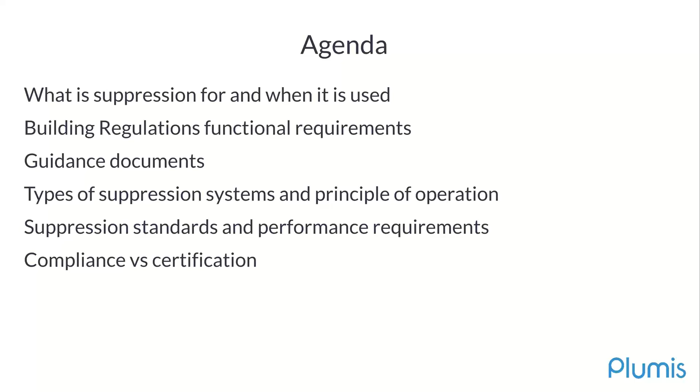And then the most common types of suppression and the difference in operation between them. The key objectives of suppression standards and their performance requirements - that's the part where stakeholders should really be versed. The difference between compliance and certification, which is also frequently a confusion, and an explanation of other suppression industry jargon.

Then I'll talk about, following Dame Hackitt's Building a Safer Future report, fitness for purpose. And finally, I'll just talk about ongoing development in the residential fire suppression world.

So first, let's start with first principles. What is the purpose of suppression? There are only two key objectives really when you deploy suppression for life safety, and this presentation is about life safety.

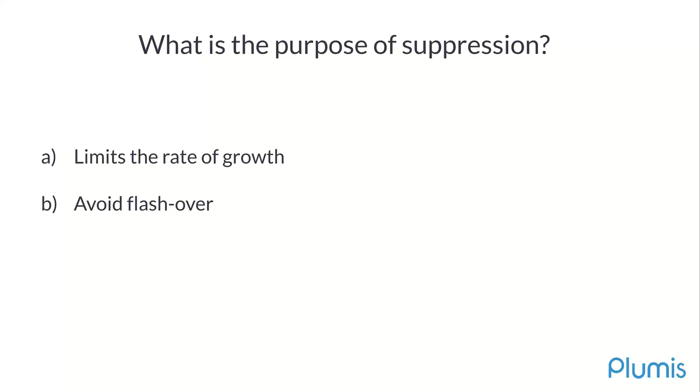So the first is to limit the rate of growth of a fire, so that effectively the definition is that the growth is reduced. And the second is to avoid the flashover, where the temperature of the room is so high that every item in the room combusts. These are really the only two things, and everything that comes into meeting the functional requirements of the building regulations is a function of these two key purposes of suppression.

So I'll explain this a bit more. In your typical fire growth curve, you firstly have ignition and there's a period of incubation. The fire then progressively grows as it spreads. There's a progressively higher heat release - the amount of power of the fire, usually measured in kilowatts or megawatts, which is the heat produced by that fire.

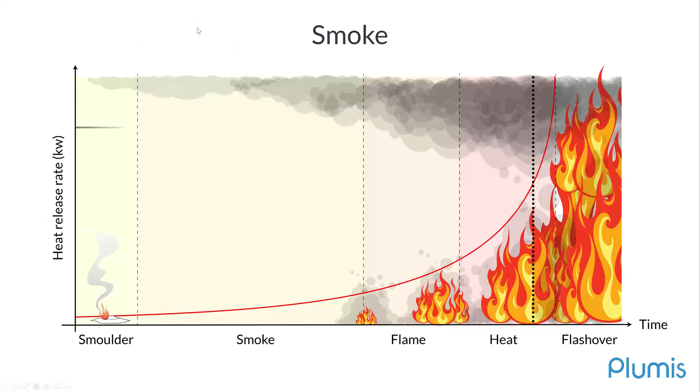As you can see, this grows parabolically - this is a function of time squared. And of course, there's a moment during the fire growth that if the person is trying to escape, there's a limited time until they can do that, at which conditions become untenable. That is the tenability limit. The whole point of suppression is that it avoids reaching this tenability limit, so that the available time for escape can be extended.

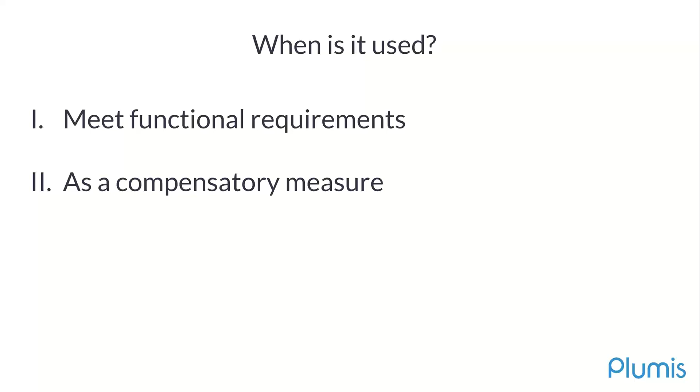So when is suppression used? Well, there's a few ways in which it's used in the building regulations. The first is to meet functional requirements - these are B1 to B5 of the B schedule of the building regulations. The second is to be used as a compensatory measure, where the functional requirements are being breached or not met by the design of the building without the use of suppression.

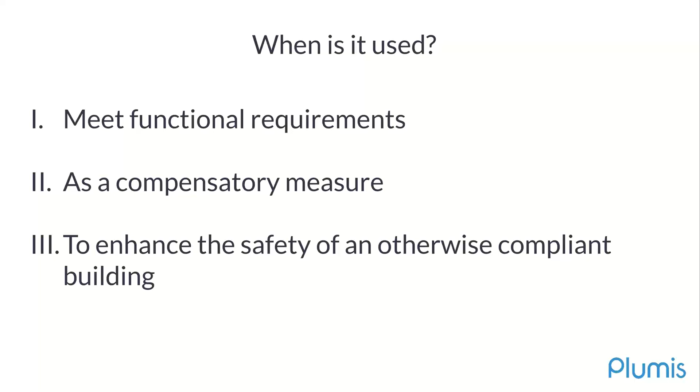And then the third, which is becoming more common, is to enhance the safety of a building that would be otherwise compliant with its current design.

So going into what is meant by the functional requirements, there are 5 functional requirements, B1 to B5. I'll go only through those really truly relevant for suppression. The first one, B1, is that there has to be a warning of fire, and there also has to be a means of escape to a place of safety.

And the first clarification that I make is that a building has to comply with the building regs, not the suppression system. I mention this because this is something which is often incorrectly asked of us. The suppression is just a tool to contribute to making the building compliant with the building regulations.

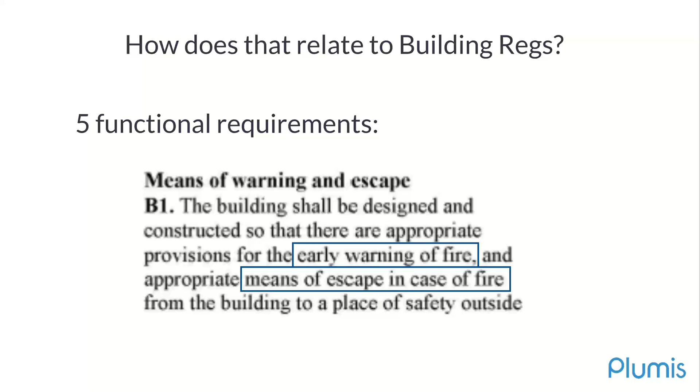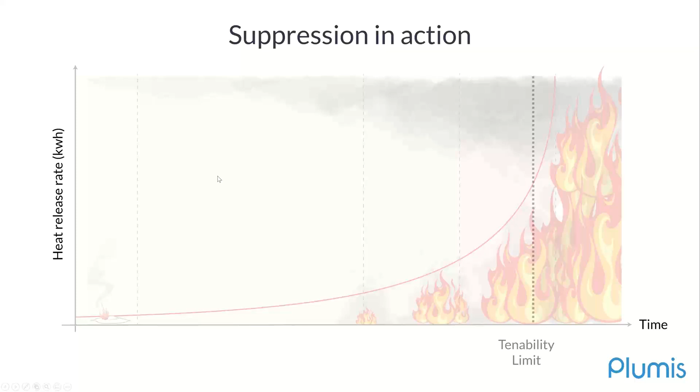Although protected escape routes and alarm systems are the most typically used tools for meeting B1, suppression can also contribute to that. The activation of suppression increases the period of tenability in the room, effectively increasing the time the occupant has to escape through the means of escape.

The activation of suppression is also a possible means to warn occupants of a fire, whether the suppression system is linked to an alarm system or whether it integrates an alarm system within its functionality.

Another clarification I should make is that the means of escape is not just the stairs and the corridors. It is every compartment which is part of the escape route. We've unfortunately seen too many requests for suppression systems to be used only in the stairs or corridors because that's what's been interpreted as the means of escape.

However, there is typically no fire load in stairs or sterile common corridors. It is the areas of occupancy where there are fire loads, and these are the ones that need to be protected when they are part of the escape route. So this is a typical misunderstanding.

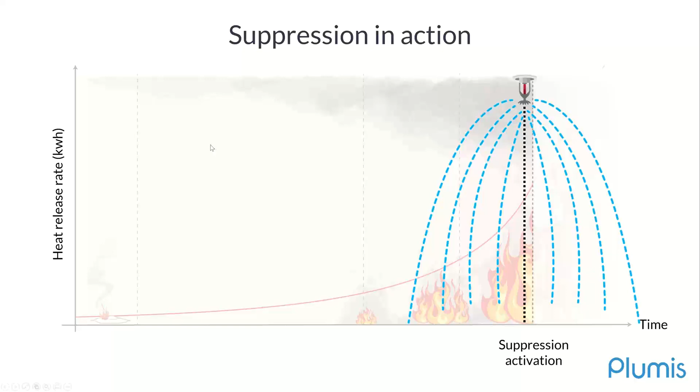So then I'll talk about B3 as well. It talks about internal fire spread. Again, as per suppression, we're avoiding a flashover - where temperatures are too high, and as a result there's a need to ensure that the fire is contained in the compartment of origin.

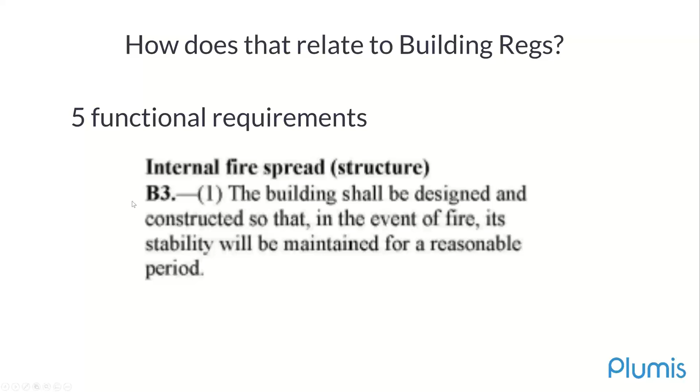However, suppression can be used as a secondary layer, basically, to ensure that the fire will not spread beyond the room of origin, where passive fire protection has already been used.

So now if I cross the objectives of suppression with the functional requirements of the building regs, we can see how, for example, limiting the growth rate of a fire buys time for egress through the means of escape, contributing to meeting B1. And by avoiding flashover we're helping the role of passive fire protection, which avoids fire spread from the compartment of origin, contributing to B3.

So a second way to use suppression within the building regulations is to act as a compensatory measure. This means that if the design of the building as is, without suppression, cannot comply with the functional requirements, then suppression can be used to compensate for that and return it to a compliant status.

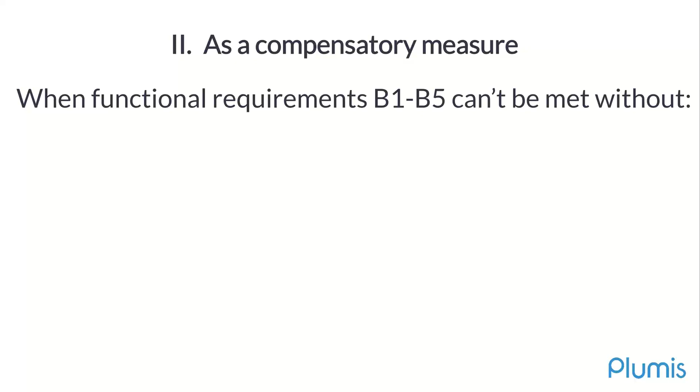For example, if the building has been designed with a single escape route, or the escape distances are longer than what fire engineering considers safe, then suppression can be added, and by delaying the fire growth, the available time for escape is extended so as to meet B1.

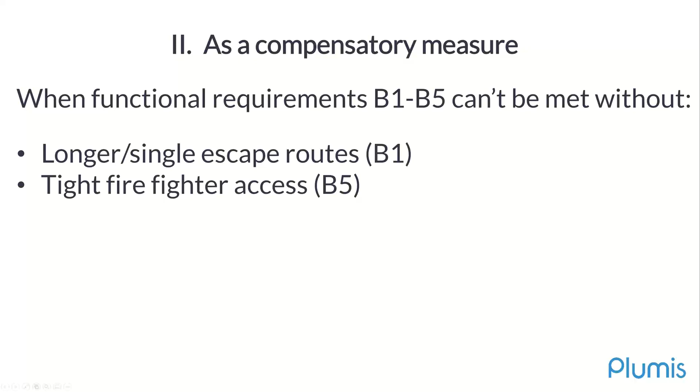Similarly, B5 talks about access to firefighting engines, for example. When there's limited fire engine access, suppression can be used to extend the time firefighters have to reach the building and contribute to the fire suppression exercise. This is typically known as the 45-meter rule, and it is a typical use of suppression as a compensatory measure.

Then we have another example, which is open plan layouts, where a flat might have a living room and a kitchen together, which are part of the escape route. This is where there are fire loads, and this is where suppression again extends the time occupants have to escape while the fire is developing.

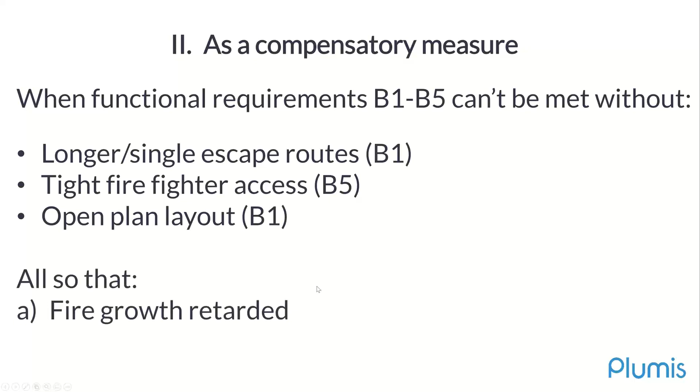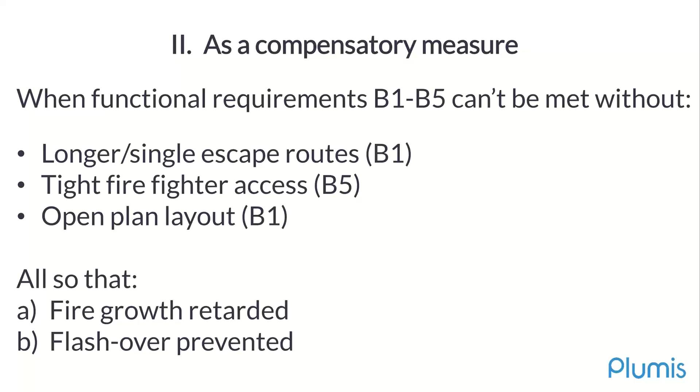In all cases, these are the functional requirements that might be met by relying on the fire growth being retarded and/or flashover being prevented. Unfortunately, these first principles of suppression and the building functional requirements are frequently forgotten within the multitude of guidance documents available. And when suppression is specified, it's also not very common to find the statement of why it's being used, what objective it's trying to achieve, why it's being used as a compensatory measure, for example, unless a fire engineer is really involved, which is really unfortunate.

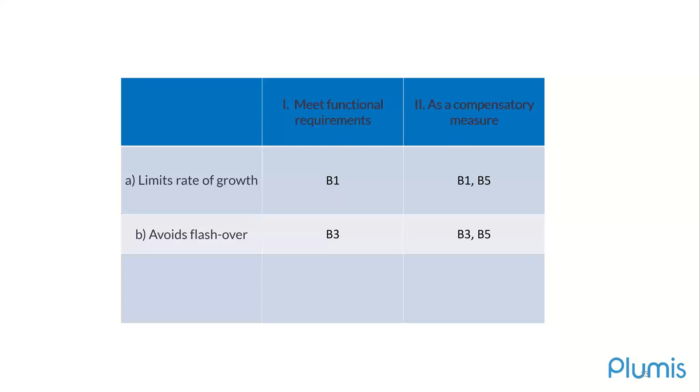So this table is really just a summary of what I've just stated about how suppression and the functional requirements work together, through limiting fire growth and avoidance of flashover. However, it's important to note that nowhere in the building regulations is the expectation that occupants will remain in the room of origin and that tenability will be maintained indefinitely. It's assumed that occupants are always mobile and that they will escape.

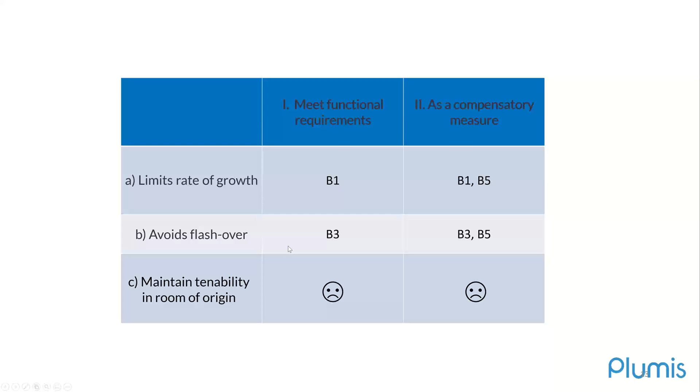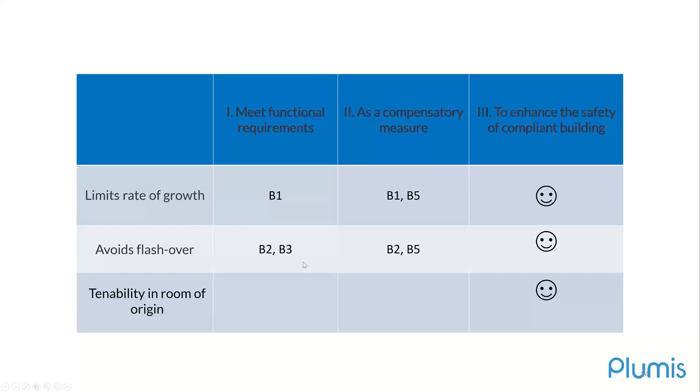There are systems now being designed with this additional objective in mind, regardless of whether the functional requirements in the building regulations require them or not. This is the third trend I'm talking about: enhancing the safety of an otherwise compliant building. It's an additional layer for improvement of B1 and B3 where it's already technically compliant, such as requiring suppression in new builds above 11 meters in height. It can also protect those who do not have the mobility to escape from the room of origin. This goes beyond what is required by the functional requirements of the building regulations, but it is present in some guidance documents, such as the Specialized Housing Guide.

So I'm going to use an analogy to explain the difference between building regulations and guidance documents. The building regulations are the performance requirement. In this example, the performance requirement is to get safely from A to B. Approved Document B is a guidance document, and it would say that a ladder is an example of a tool that has been historically accepted for getting from A to B. ADB also states that if using a ladder, it's best practice to use a standardized ladder that fits the ladder stencil, which ensures that a ladder will work best as a ladder.

So which are the common guidance documents that specify suppression? ADB recommends the use of sprinklers, and BS9991 recommends the use of sprinklers or watermist. What's the difference between the two? It's just a different level of sophistication, where BS9991 dives more into the details of the world of suppression and fire engineering. Both are based on the same principles I stated earlier. The difference is that BS9991 has more detail on the types of buildings and types of suppression systems that can be used.

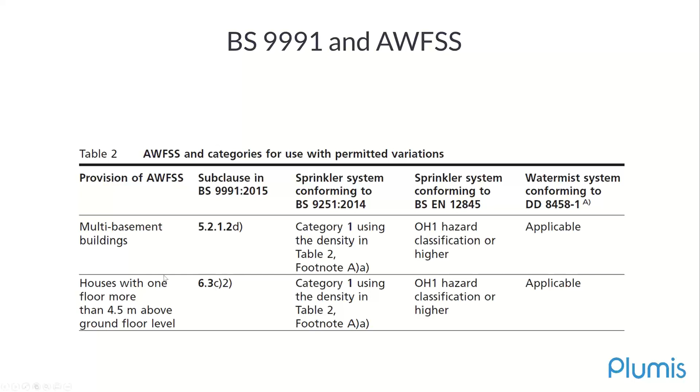Another clarification: one does not have precedence over the other. Both are just guidance documents based on historical practice. As with the ladder example, both require common sense and due diligence. Neither of them is the law. It's only B1 to B5 which are the law of what I've talked about today, which is basically like the ladder — the law is the performance requirement of getting from A to B, not of using the ladder itself. The ladder is one of the ways you can achieve that. This is an example of a table extracted from BS9991, showing more granularity in the use of suppression.

So let's start going a bit deeper, starting with the oldest of the automatic suppression methods: sprinklers. Firstly, for residential purposes, they only exist as wet pipe, meaning the pipes are charged with pressurized water all the time, and the nozzles are activated by mechanical means using a thermobulb. This also means that because sprinklers are primarily driven by gravity, the nozzles tend to be mounted high, usually close to or on the ceiling, so that gravity can help in the wetting process.

So how are sprinklers defined? How are they coded, or better still, what are their stencils? These are some of the more common standards, and I'll go into more detail about the differences between them later on.

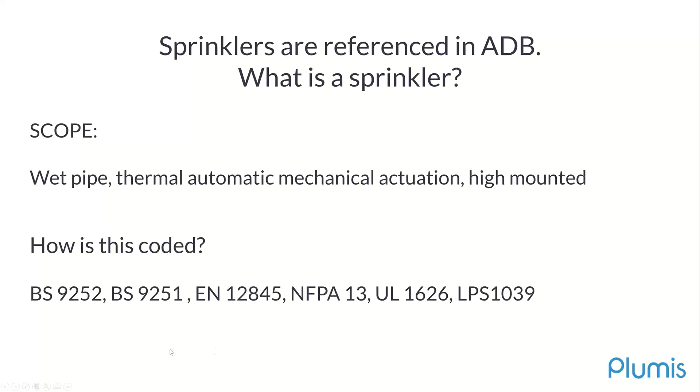So the first patent for sprinklers was in 1882 by Mr. Grinnell. As you can see, today's nozzles don't look much different from what they used to. That's in part due to the very smart, brilliant design, but also in part because once it was coded into a standard, its scope became very specific and narrowly defined. That limits how much the sprinkler itself can vary, because before it becomes something other than a sprinkler, it falls out of the scope of the standard that guides it.

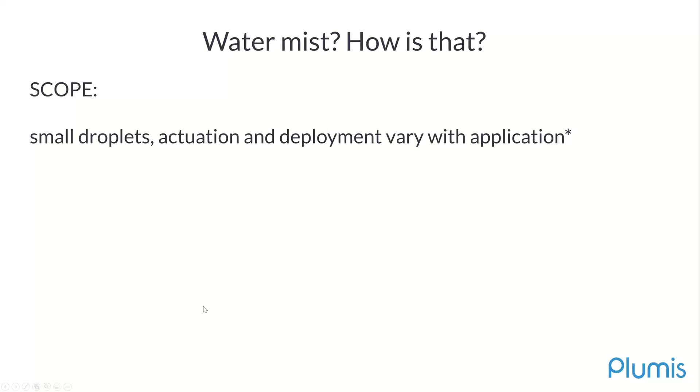On watermist, internationally, its definition tends to be much broader, although for domestic systems in the UK it's still currently only a wet pipe. More internationally, variations in how it's deployed are much wider, and how it's therefore implemented depending on the application is also much wider. The key definition for watermist is really that it is the use of small droplets, smaller than 1 millimeter in diameter. I'll go into more detail later.

And again, how are they coded? There's a number of standards. I'll go into detail on what each one of them means.

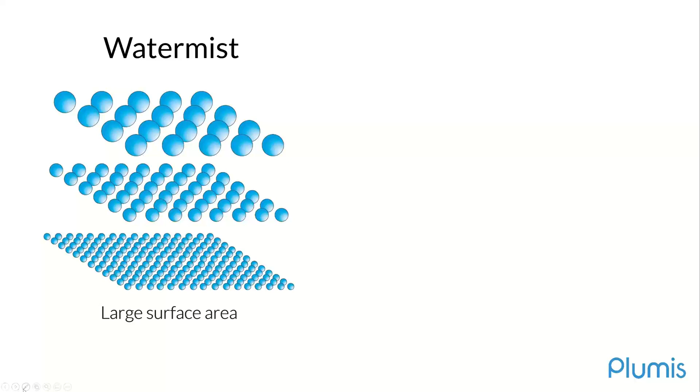For watermist, the key objective is that you're using smaller droplets, creating a larger surface area. This allows you to leverage the best of the sprinkler, which uses water, and the best of gaseous systems, which create an inert atmosphere. Therefore, it has a higher compatibility with a wider variety of fires than either of the two methods by themselves.

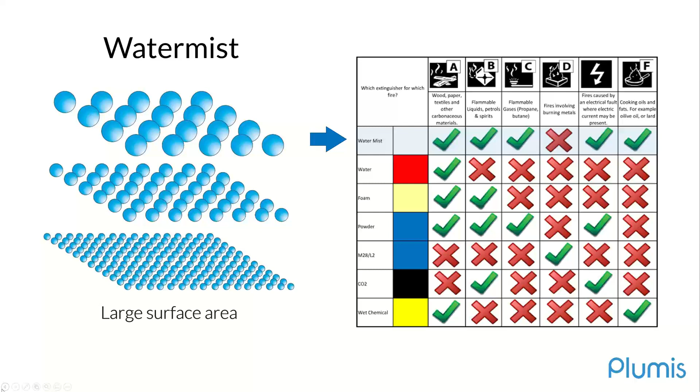So I'll go into a bit of physics to explain the difference between them. This is Ragnar Wighus, past chairman of the International Watermist Association, who highlighted to us how Archimedes works well for watermist, while Newton works well for sprinklers. That was very useful and stuck with us.

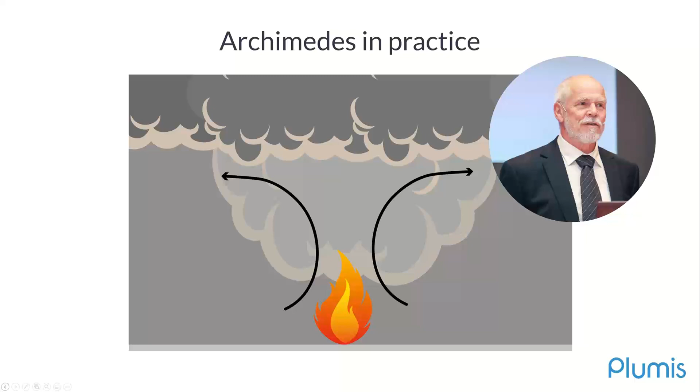Sprinklers produce large droplets, and the nozzle located on the ceiling or high up in the room allows gravity to pull it down and wet surfaces. The fire cannot progress well over wet surfaces, so it gets suppressed. The large droplets also allow it to go through the hot layer or the updraft of the hot combustion gases without too much loss of water through evaporation.

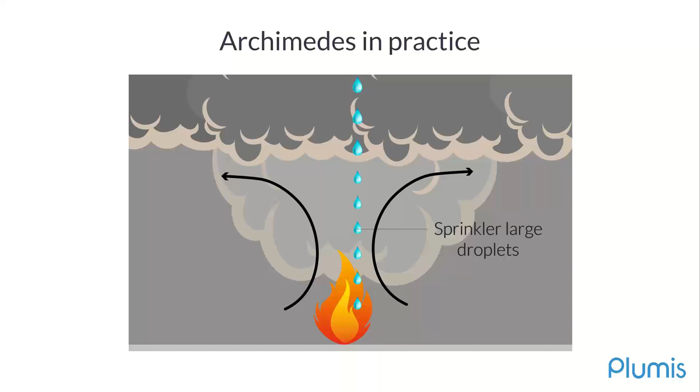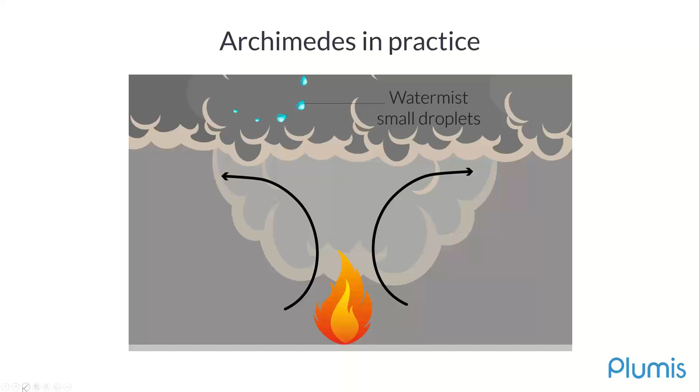If the same principle was expected from watermist, on the other hand, the much smaller drops of water would result in a significant portion being lost due to evaporation in the hot layer, and even against the updraft of the hot combustion gases.

Instead, watermist nozzles are designed so that the small droplets can be drawn to the base of the fire by the natural air draft created by the pumping action of the fire. When mist reaches the base of the fire, it evaporates and creates an inert gas layer when it's converted to water vapor, and in the process extracts heat from the fire.

The consequence is that there's less use of water for the same suppression effect when using watermist because of its different means of operation. There is arguably an environmental benefit because of the reduced water discharge and therefore runoff. But it's also important to highlight that even sprinklers are beneficial—many studies have shown that the discharge of sprinklers results in a lower carbon footprint compared, not surprisingly, to a fire which is left to destroy a whole property or even with firefighter intervention.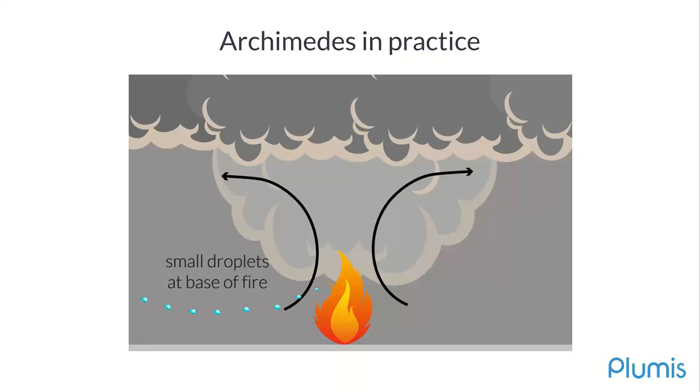For watermist to be deployed at the base of the fire, there are many different ways in which nozzles are placed, designed, and located, depending on the application. Some of these might resemble sprinkler heads, in which the nozzles are pendant and use a heat sensitive element. But there are also applications where the nozzles are placed on the floor—this is common for the protection of, for example, helicopters in hangars, so that the mist layer is placed close to the ground and close to the base of the fire.

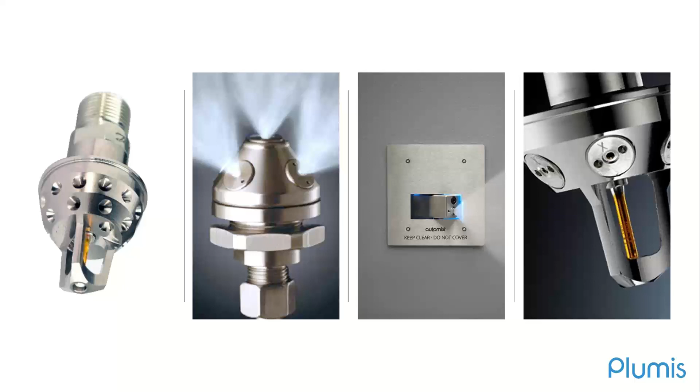There are also electronically controlled nozzles, and directional nozzles, which is what we manufacture, activated by detection systems, for example. The objective common with all these nozzles is just to position the discharge of the mist to maximize the deployment locally at the base of the fire, as opposed to being limited to being located on the ceiling like a sprinkler, and relying exclusively on leveraging gravity and the ability to wet surfaces.

I'm going to go into a bit more detail on why one would use an electronic nozzle. The first idea here is to leverage the use of detection, which has a much faster reaction time than a mechanical system—it's electronic, with much less thermal inertia, and it could use different sensing methods, not only heat but smoke. That generates a first knock and also raises the alarm, which contributes to the means of escape.

Then the fire can be verified as a true, dangerous fire, and that's where the second knock comes off, followed by the discharge of water. The whole objective is to ensure that the fire is as small as possible at the moment of discharge, so that even less water is required to obtain the same suppression effect. At the same time, there's a smaller fire to be tackled, so there's less smoke and less heat in the room, which further extends the tenability to the occupants in the room.

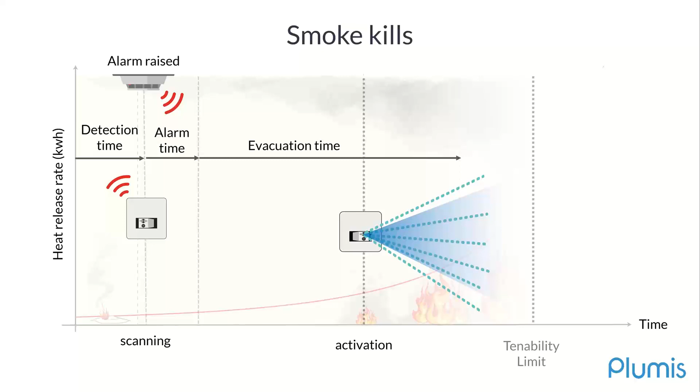Okay, so I'm now going to go into a bit of the key concepts of standards. The first is that there are typically three objectives of standards, but they're not necessarily present together at the same time. The first is consistency in design, and the objective here is interoperability.

You can think of an M5 screw, for example. The standard allows screws from different manufacturers to work seamlessly, as opposed to custom threads for each one. A type of thread for each manufacturer would certainly be a hassle for all of us.

The second is one that seeks consistency in performance, or consistency in quality. Looking back at the ladder analogy, it would be the code developed to test and validate that the load each step can support on a ladder is adequate and consistent. By the way, there's a standard for that - it's EN 131, in case you're curious.

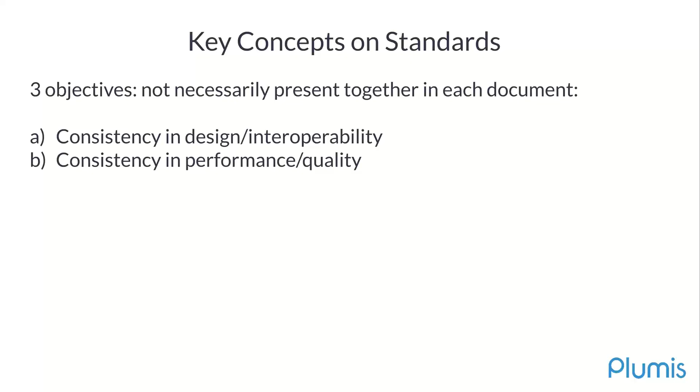And then there's the third C: consistency in practices. This is what we would call a code of practice, and it's probably the most common in the UK for the suppression world, where it documents the best practices of installation and maintenance, for example. This is exactly what BS9251, the most commonly cited standard, is about.

So it's important that when a standard is referenced, it's very important to understand which of these objectives are really being addressed by the standard.

BS8458, for example, the UK watermist standard, covers mostly performance, with very little guidance on practice. It in fact defers the code of practice part to the manufacturer's installation manual, and that's quite different from sprinklers, of which BS9251 is more about practice - it's an installation and maintenance guide.

So in this presentation, I really want to focus on the performance requirements for suppression, and helping define whether it's fit for purpose. This is because I find it really relevant for stakeholders.

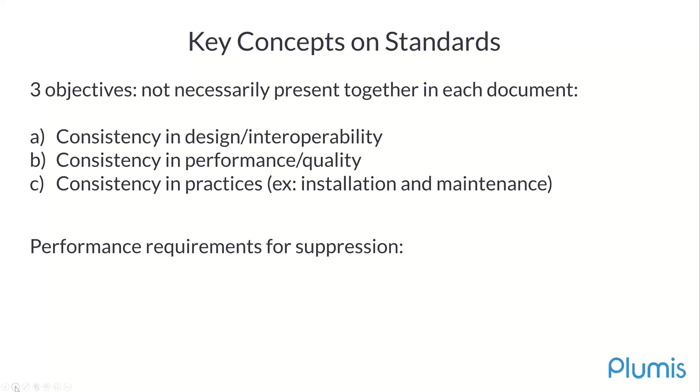It's information that's beyond designers and installers of the system. It's key to understand some of these performance requirements, so that stakeholders can understand whether the system will work once installed in the field.

I'll break down the performance requirement into three main items. The first is the fire test, and these requirements are common in BS9251, BS9252, BS8458, and EN 12845, the sprinkler standard. I'll go into more detail on that later on. But the first item here is the fire test, where the system is tested with a standardized, stylized furniture setup.

Then there's the verification of the water supply flow for that installation, and whether it will provide the flow of water demanded from the nozzles activated. And finally, the verification of the piping of the system - whether it will allow the water supplied to be deployed in enough volume as required by the nozzles.

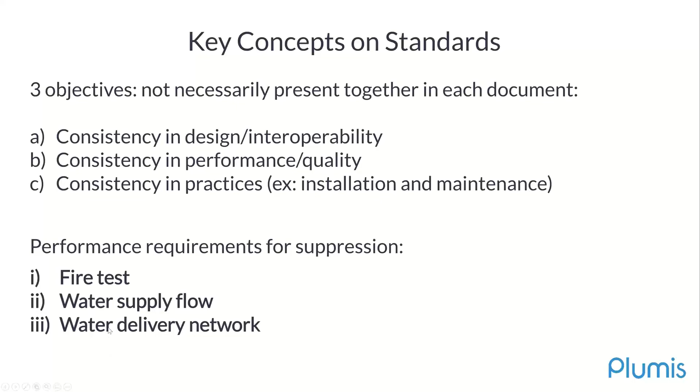So let's go first through the fire test, which is internationally used to validate a suppression system. Let's see if this plays.

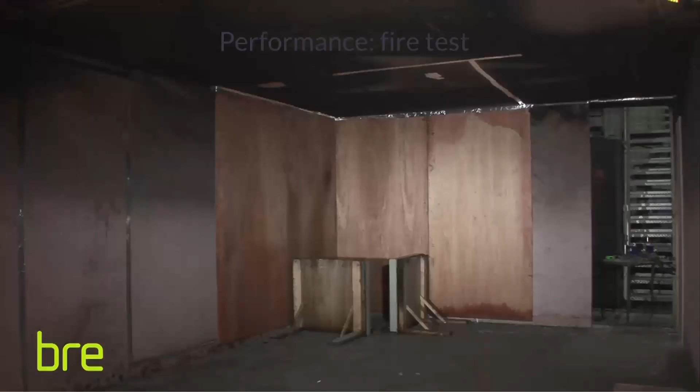As you can see, this tries to represent the furniture in a standardized, repeatable way. On the left, you have a free burn, and on the right, a suppression - in this case done by a sprinkler. The whole idea is that you're capping the growth of the fire. On the left, if you were to let the fire grow, flashover would be reached, though that doesn't show on this video. And as this video clearly shows, suppression is not necessarily extinguishment - that's why it's called suppression. It's literally to cap that fire growth and avoid it growing at the rate it would were it a free burn.

Okay, my second item is with respect to the adequateness of the water supply. In a correctly designed system, the water supply will match the demand for all the nozzles expected to operate in that installation, up to a maximum of 4.

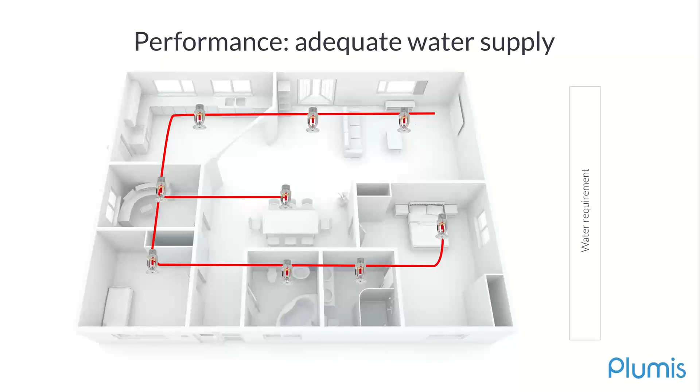So there might be the assumption that only one nozzle operates. In fact, the standard says between 1 and 4 nozzles might operate, depending on how many you have in a room. In this case, we have 3 nozzles in the room, and all 3 should be expected to activate. When we do have a fire and all 3 nozzles activate, if there's too little water supply available, the fire will grow.

Because there's overall less water available for each of the nozzles. As the nozzles activate, there's less water available per nozzle when compared to the water supply that was tested in the fire test, which is not typically run with more than 2 nozzles. So all residential tests are run with 2 nozzles, but if there are 3 or 4 nozzles in a room, then the water supply should be enough to supply all of them being activated. This is key because, as opposed to a commercial setting, a domestic setting won't necessarily have that water available, which is why suppression systems sometimes need tanks.

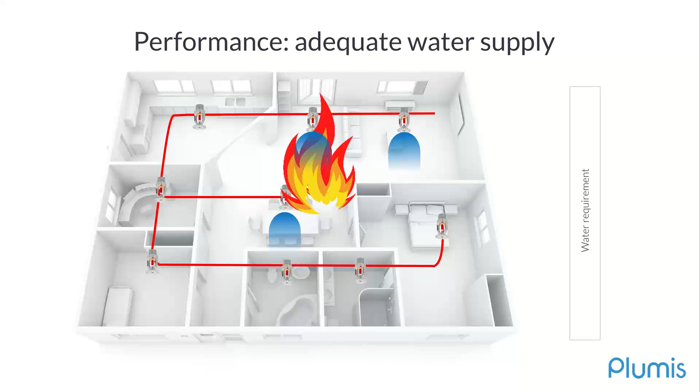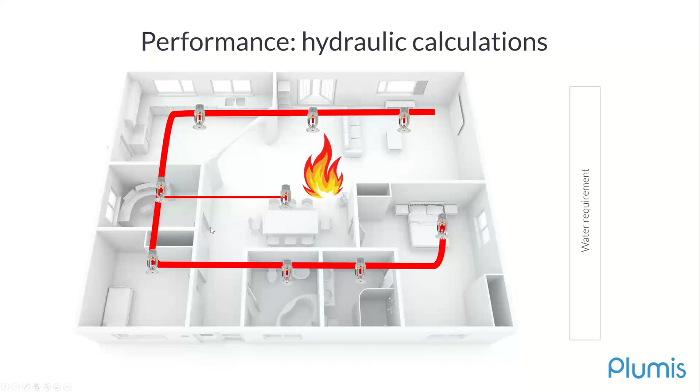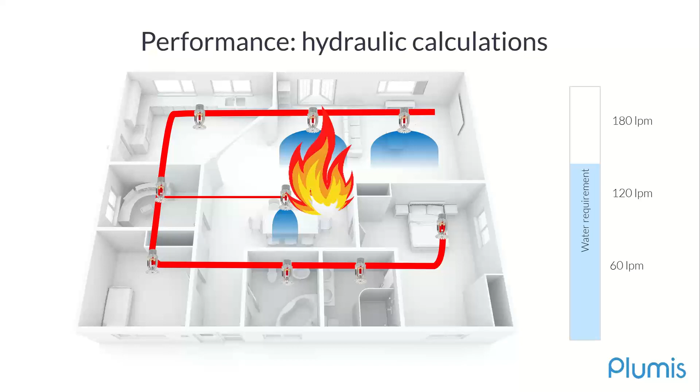The second is the need for hydraulic calculations. For an installed system to perform, the piping has to be of sufficient diameter, or of limited length, so as not to result in too much restriction of water flow, which again would limit the flow of water from the nozzles. So when compared to a fire test, if the nozzle does not have the amount of water expected from a fire test, then there is a risk of a larger fire than what was tested in the verification test, which verified that it would create tenable conditions in the room. So in the end, the installed system will not replicate the tested system on the standardized fire test, and this is a requirement to comply to the standard, to deliver the necessary amount of water.

I'll go a bit more into the standards now. The most important thing really is the difference between certification and compliance. First, there are standards like BS, British Standard, NFPA, National Fire Protection Association, and EN, European Norm, the European standard. These are examples of national or international standards. They've been written by committees, usually part of a committee which is part of a country or a continent, in the case of the EU. Product systems in these markets can comply with those standards.

So what I mean is that they can state that they're compliant to these standards. And where there is third-party verification of it, then there is a certificate of compliance, or a verification of compliance with that standard. The key thing is that this certificate of compliance or verification is not certification. They sound similar, but they're very different.

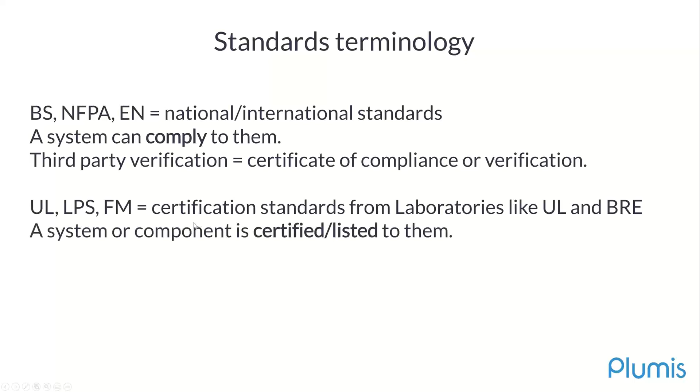For certification, these are provided by independent labs, which are not limited to specific geographies, although some might be. Some examples of these labs are UL, BRE, FM, CNPP, and they frequently have international reach. Standard examples of their standards are UL, LPS - LPS being a standard written by the BRE. All these labs basically carry out fire tests of components and systems, and provide certification against the standards that they themselves write. This means they have the autonomy to write their own test protocols to ensure they've properly scrutinized that system or component, which may be well beyond what a national standard has coded into its standard.

So this is another type of third-party performance verification, but this one is indeed a certification. There's a clear difference between the two, and obviously certification, as opposed to verification of performance, is the ideal. It's a proper third-party verification of suppression.

I guess the first caveat is that it's not mandatory to have certification of domestic systems. It is very common to have them in commercial systems, but that's because it's a typical minimum requirement from insurers. It is nevertheless desirable for domestic and residential applications, because it is a third-party demonstration that the system will work as intended, even in the long term, over the life cycle of the product. It's declared by somebody else who still has skin in the game because they're effectively technically underwriting that system by certifying it.

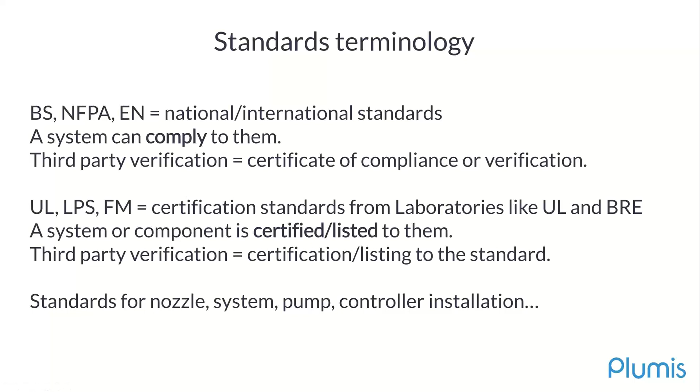And there are standards for nozzle, pump, controller, and installation, but it gets a bit more complicated than that.

I'm not going to dwell too much on this table because this could take all day. It's just to highlight that there are many types of standards for all the different components of the system, and sprinklers do not have a system certification—it's just the nozzle or the other components in it. There's only a very small proportion of the applicable standards that apply to suppression that really get cited in ADB and other publicly available guidance.

There's much more than just a recommendation of how the system should be installed. It's also how the system should be tested and verified to be durable and perform over its lifetime.

It's also useful to note that some standards have not yet been published, even for sprinkler systems. This is for residential, and it shows that it's really a result of not having much interest from manufacturers to get them certified.

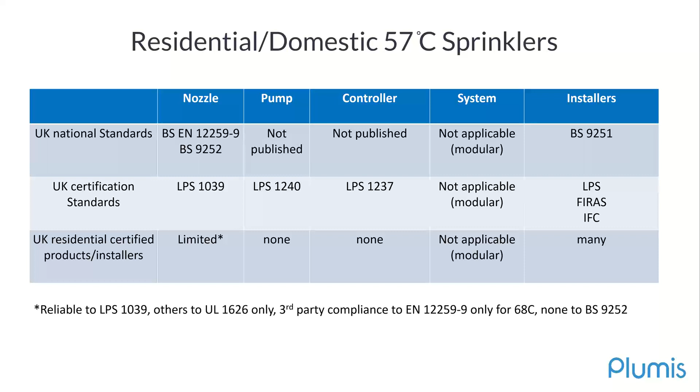It's also important to highlight that asking for compliance is not the only question to be asked. Certification of components and certification of systems are also important questions to be asked by stakeholders. Insurers certainly ask them.

Things are not much different for watermist. The only difference, of course, is that watermist has not been in the market for as long as sprinklers, which means there are fewer standards published for watermist than for sprinklers—but this is to date. This is changing. There's even now an EN standard recently published for watermist.

As you can see, there are also system standards, and many standards published by UL, FM, and VDS and other European labs, given that there's a higher presence of watermist manufacturers in Europe.

Commercial and industrial watermist applications are also more common. So sometimes even commercial systems are used in residential settings, just because they have been certified and an insurer is demanding it as a higher level of confidence and reliability.

We as a manufacturer are actively pursuing certification at UL in the US for our domestic system, given that there's none available in the UK for us. And there's currently no fully certified domestic water suppression system in the UK market at all yet.

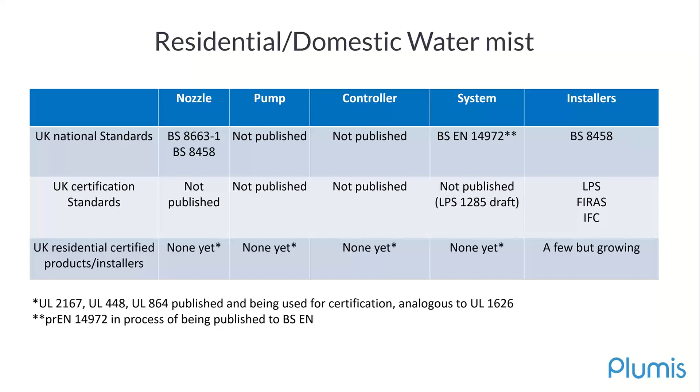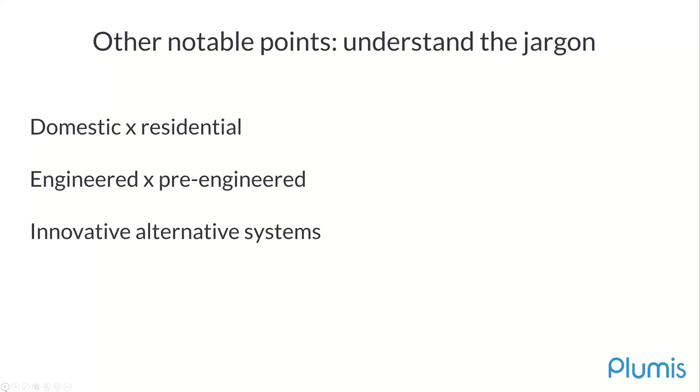I'd also like to explain a few other jargons within the suppression industry. First, just to clarify the difference between domestic and residential, engineered and pre-engineered, and how innovative and alternative systems work within the existing framework, and the challenge for innovation in the fire sector.

This is a residential building with multiple dwellings. A suppression system might be a residential installation, which includes one pump and tank for these many dwellings. Yet a residential building may also have a number of domestic installations. This is common in refurbishment, in retrofit, or even to address an inner room scenario where the building originally did not require suppression. Although it's rare, it could also be done in new build where every flat has a domestic system in it, which becomes a multi-domestic installation instead of a residential installation in a residential building.

The key is that the definition of domestic is a system that protects one or two dwellings, not more. However, a multi-dwelling residential building, due to its higher risk of occupants—obviously because of the longer escape route and the delayed firefighter access—it's typical for there to be additional requirements recommended to compensate for these extended distances, for these additional risks.

This is, again, suppression being used as a compensatory measure, or additional measures of suppression being used as a compensatory measure. These include running suppression for 30 minutes instead of the typical 10 minutes for domestic, and also, for example, having a secondary power supply for additional resilience.

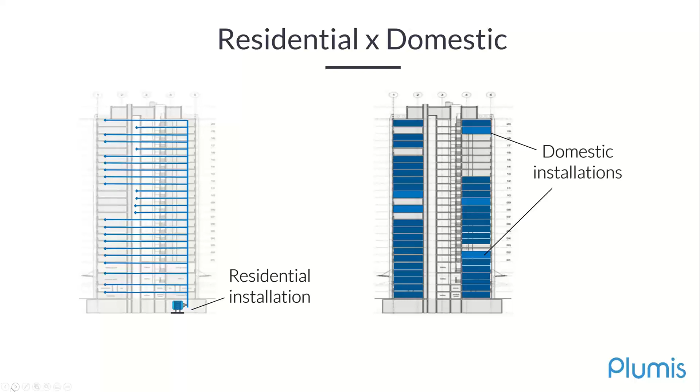Then the resulting situation could be of a domestic dwelling in a residential building meeting residential requirements. I hope that is clear, the separation between a domestic building, domestic installation, and a dwelling and a domestic installation.

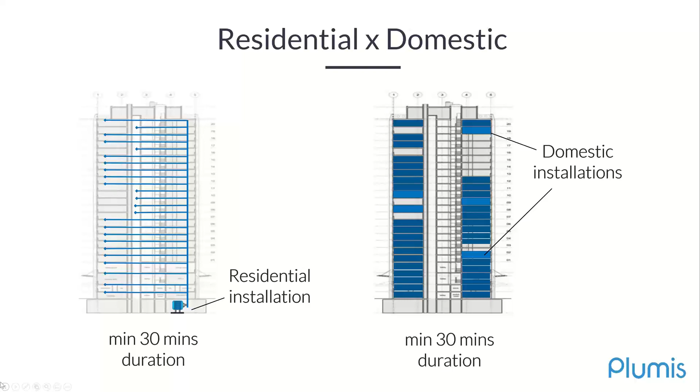So what does pre-engineered mean? Well, pre-engineered just means that the design work of the hydraulic calculation has been done by the manufacturer. So the pipe lengths and diameters are all pre-established in the system.

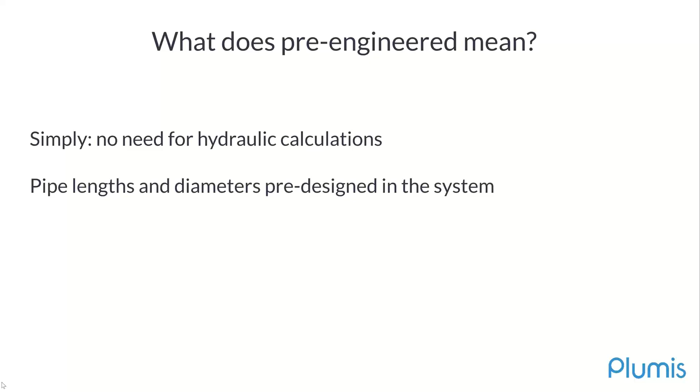The advantage is, of course, that there's a cost, effort, and risk saving in designing the system, because that's already been predetermined by the manufacturer. There is one less thing to worry about from the installation point of view, and therefore in terms of the performance requirement for the suppression system.

But there is a trade-off, which is that there is limited coverage in terms of area. You cannot cover a shopping center or a whole high-rise with a single residential pre-engineered system because of the limited pipe lengths. So this tends to be domestic systems, which are pre-engineered and are limited to one or two dwellings.

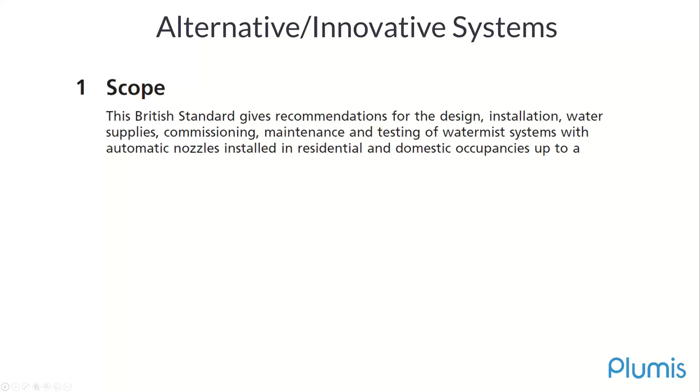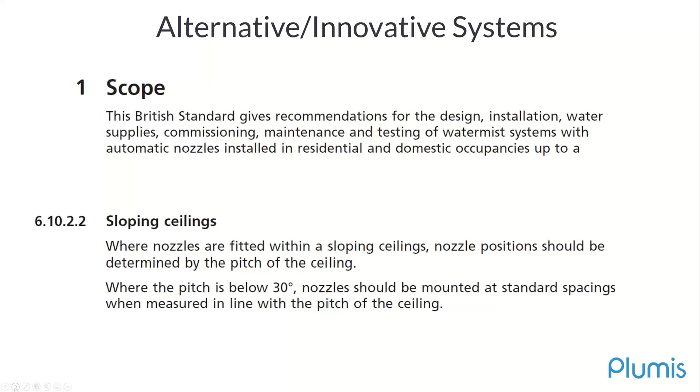Now talking a bit about innovative systems, which is what we as a company were about. As I showed early on, the sprinkler is very narrowly defined. A UK residential watermist system is also very narrowly defined, as only applicable to automatic mechanical nozzles and as wet pipe. This is unfortunately against the principles of even the British standards, coded in BS0, where performance requirements should be prioritized over descriptive characteristics which limit the scope, which is exactly the case here.

So if I go back to the ladder analogy, if a ladder is a historically accepted practice to meet the performance requirement of getting from A to B, then what is a lift, if it still meets the requirement of getting from A to B? Unfortunately, due to the over-reliance in guidance documents, a lift is very frequently considered a non-compliant ladder.

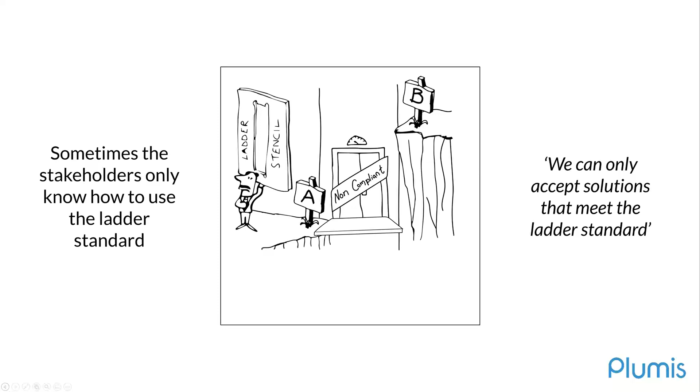This is really relevant when I talk later about fitness for purpose and Dame Hackitt. So what we argue as innovators is that one should be looking at the performance requirements, which are getting from A to B, or B1 to B5. Sure, a ladder stencil should be used if one is using a ladder. But if not using a ladder, then the performance of the lift should be judged by its ability to get from A to B, not whether it fits the ladder stencil, which is unfortunately what happens a lot.

So going back to innovative systems, I'll return to the performance requirement of suppression systems and how it applies to innovative systems, given they're not coded in the specific standards for suppression. The first is going back to the three key objectives of suppression. If it's not interoperable, is it out of scope? And if it's got a different scope, then it's just a different definition and works on a different principle.

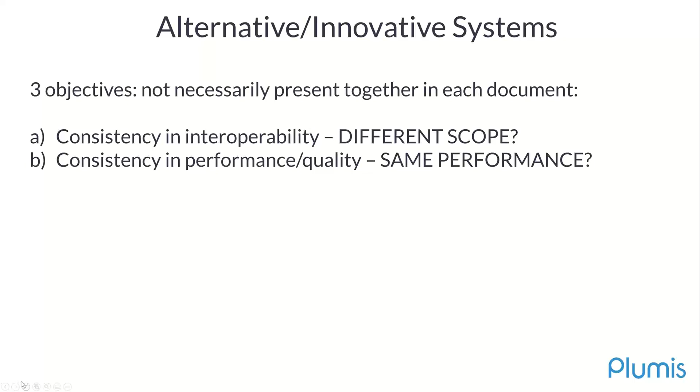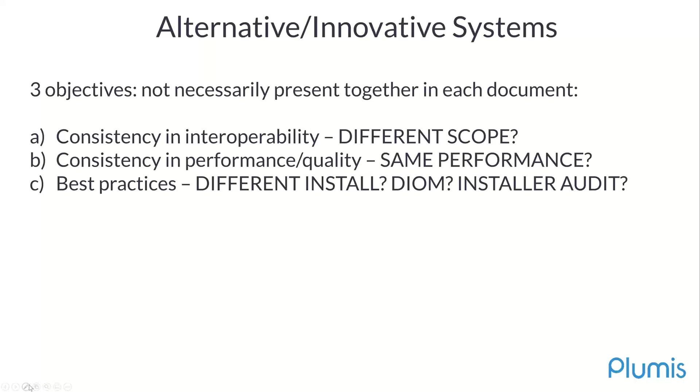On consistency of performance, can you expect the same performance of it? Does it work in a way that the fire test and other performance requirements can be verified, are relevant to be verified? And finally, is it a different installation method? If so, is there a DIOM, a design, installation, operation and maintenance manual to be used for installation?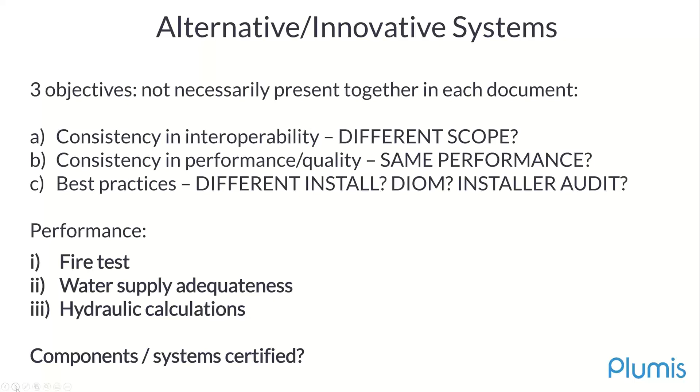So I'll go back to the three performance requirements: the fire test, the water supply adequateness, and the hydraulic calculations, which can all be assessed, verified, and third-party certified with innovative systems. It's literally the willingness to do the due diligence and verify whether it is fit for purpose, as opposed to whether it is compliant, whether it fits the ladder stencil.

What does Approved Document B say about innovation? It states that it acknowledges guidance is at odds with innovation due to its historically based approach, but it also highlights that just because compliance is declared, it doesn't mean it's fit for purpose for a specific application. It does require proper due diligence from involved stakeholders to ensure they have complied, whether through alternative means or through common practices.

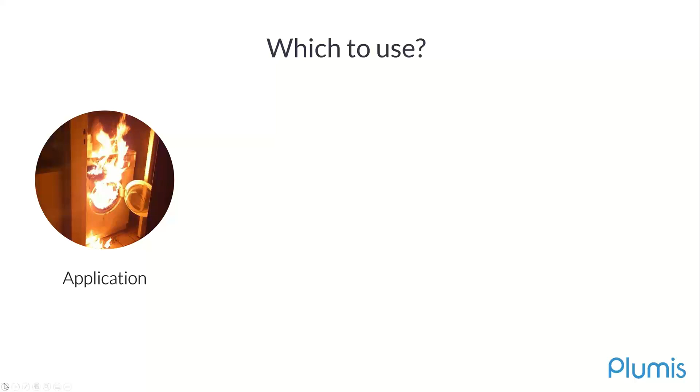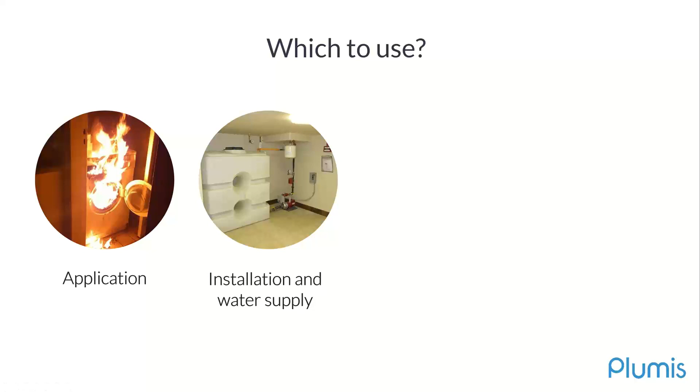Firstly, the application, the type of fire loads present in the space. This is key in domestic, as the types of fire and fire loads have changed, more about that later. Second, the ease or cost of installation, as many systems require tanks or significant changes in water supply infrastructure. Maintenance is also a question there, how frequent and how difficult. This is typically done yearly and requires entrance into the property so the nozzles can be inspected.

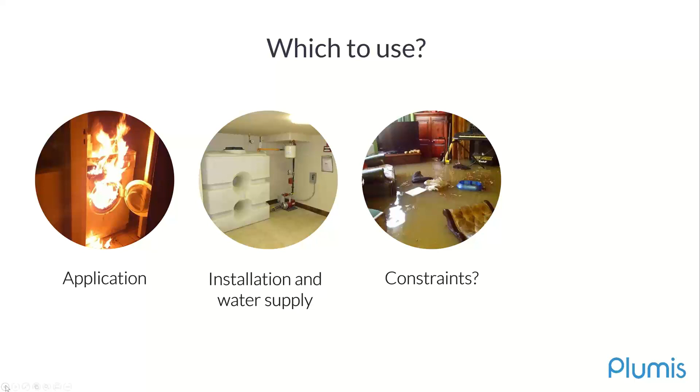Third, are there any other constraints like heritage places or multi-story dwellings with vulnerable occupants, where damage, activation and displacement are more disruptive than to the average occupant? And fourth, ensuring stakeholder buy-in. As per Dame Hackitt's report, it depends on the occupancy. There needs to be their buy-in, and buy-in includes both disruption in the event of activation, and also how the property would be disrupted with the need for maintenance.

So going more into the application, the fire problem itself has evolved over time. There are now modern methods of construction.

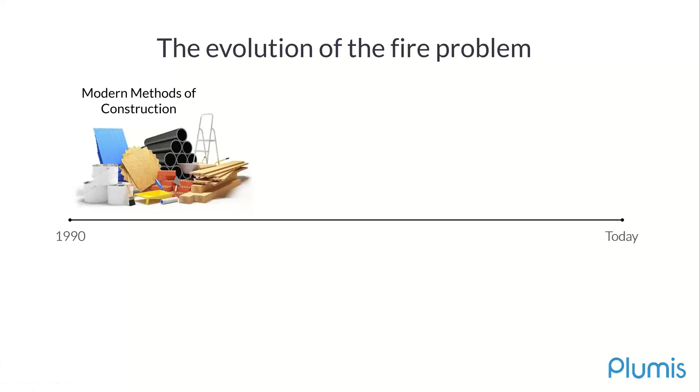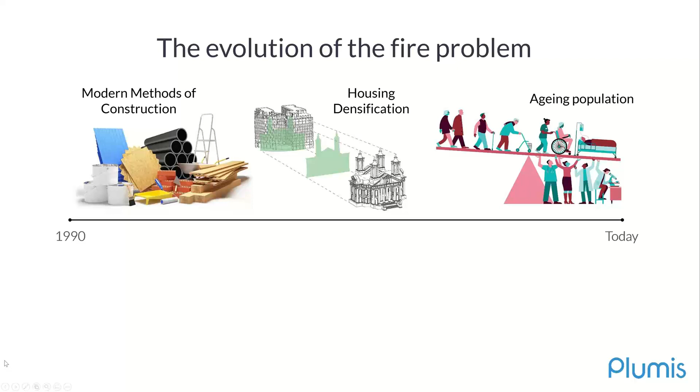There are modern methods of construction, densification, and an aging population, and these all increase the impact of a fire in case it occurs. At the same time, while there is less smoking and fewer chip pan fires, there are more electric and electronic devices in the home, lithium batteries, and white goods that create different types of fire hazards in the occupancy. White goods are becoming a more frequent cause of fire in domestic environments, and we're developing systems to tackle these evolving types of fires.

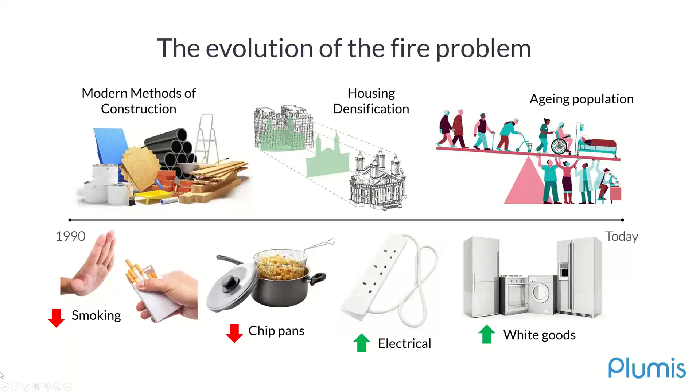So this takes us to building a safer future: the outcome-based approach that makes stakeholders look into the occupancy characteristics, instead of a one-size-fits-all approach, when defining the right collection of solutions to meet the performance requirements of the building regs.

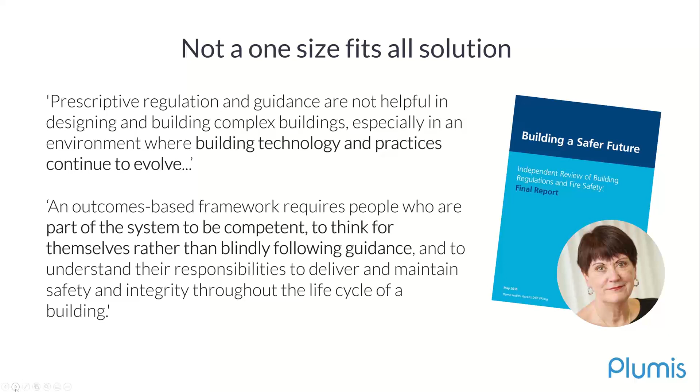Guidance should not be an excuse to avoid common sense, as Dame Hackitt asks, and this should be looked at truly on a case-by-case basis. Going back to the ladder analogy, there's occupancy where the risk is not exactly the average risk of occupant, and historical solutions may not really be fit for purpose.

So this is exactly what the outcome-based approach seeks to achieve on a case-by-case basis. Finally, I'll go into how suppression systems now are being developed to address some of these new issues. Let's see if this video plays.

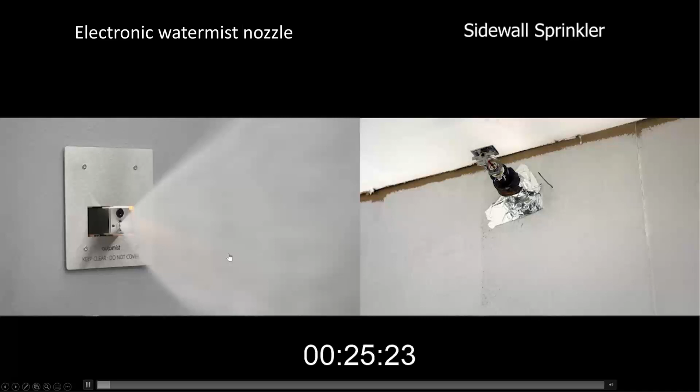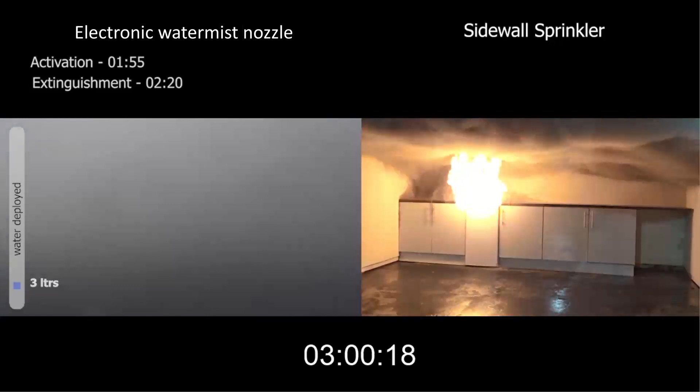The idea is firstly tackling modern fires more effectively. This is a comparison between an electronic nozzle and a traditional mechanical nozzle. White goods create concealed fires, as you can see, which produce a lot of toxic gases and are difficult to suppress just through wetting. The targeted electronic watermist can create a turbulent, saturated environment that can quickly suppress the fire and reduce heat and smoke production quickly, and its suppression can even extinguish it before other systems get to activate.

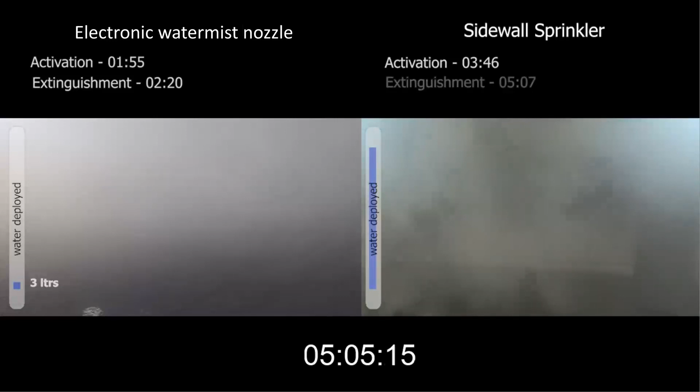The loss of visibility is then predominantly just suspended mist in the environment, instead of hot, dense, toxic gases that have been produced and mixed by a suppression system that has taken longer to activate. Let's just let this suppression activity finish.

Finally, as a research project, we have recently been awarded an Innovate UK grant of £500,000 to experiment with two new additions to suppression. The first is to connect our system to the internet, which allows remote monitoring.

So that if a fault is found, which could be through tampering or power loss for example, there's an immediate message to address it to the relevant stakeholders, which might include the installer who goes to do the diagnosing and service only when it is required. This replaces the annual physical inspection with a full-time self-diagnosis and remote monitoring solution, which reduces cost but also reduces disruption to occupants and significantly increases system reliability.

This also contributes to the golden thread cited by Dame Hackitt, where the digital information for that specific installation, including the design and status of that installation, is all placed in a single, digitally easily referenced location on the cloud.

And the second activity we're doing as part of this research project is to determine whether we can use the thermal imaging sensor present to detect whether there's a fire, to also observe temperatures in the room, and observe occupancy on a daily basis.